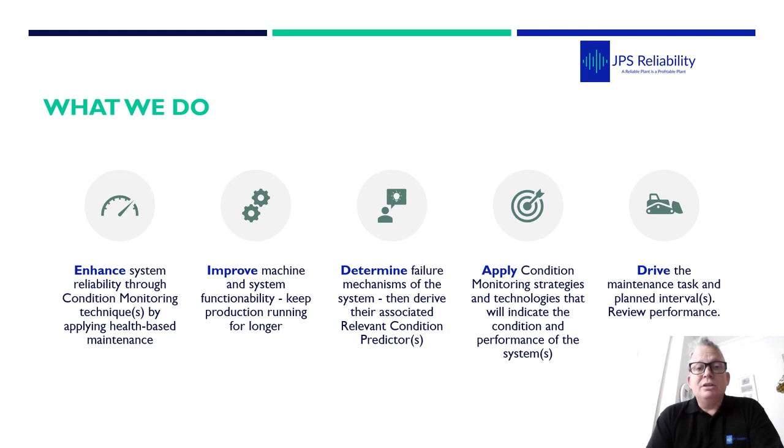practices. Our main work is we do some routine surveys, the traditional contract out reliability services, supporting companies who don't have the resources. But in addition, where a company have their own employees, we go in and help out, train, mentor, pass on knowledge to ensure that they're getting the best out of their program.

So this is our new book coming out soon, JPS Reliability Limited, Book of Gold, Practical Condition Monitoring Case Studies. This was really born out of our first book. We published a book 2 years ago-ish called Enhancing Reliability Through Vibration Technology. Now, that book was aimed at a seasoned analyst, VCAT 2, VCAT 3. It was like a revision handbook, like a condition monitoring Bible for vibration analysis.

So I had all the technical terms written in simple layman's terms, and always had some case studies in there. Now that book we sent all over the world. I think we've gone about 32 countries now with the book, and the biggest feedback we had was everyone loved the condition monitoring case studies. That's where they saw the gold was, hence why we've got this book of gold now.

Basically, we've got a proof copy coming through, which we're going to do a few little tweaks to. So that's the proof copy. It's published by the same company, The Seasoned Analyst, and this is a dust cover. Under the dust cover is the Book of Gold. Unfortunately, it weighs 1.612 kilograms. So it's got the black cloth hardback with the gold writing. We have a ribbon so you can remember where you're going.

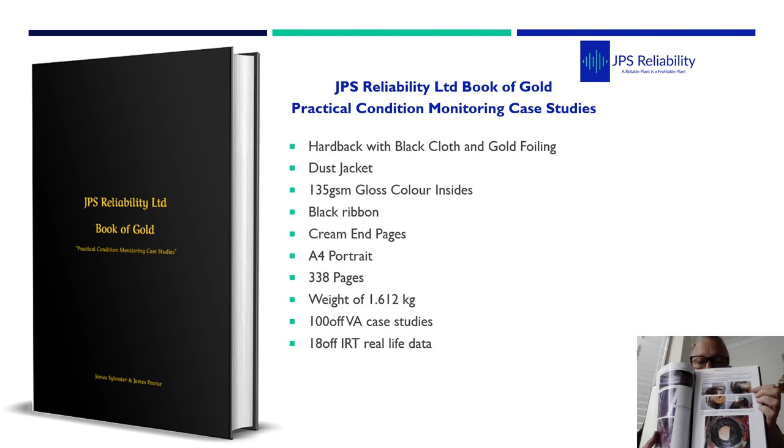The pages inside, we went for 135 GSM gloss, so they're easy to keep clean. And what that does as well, for example, on the images where we got stripped down images from our reports, it actually makes the images sort of jump out of the page. So this is 338 pages. In there we have 100 vibration case studies, vibration data, stripped down reports. We also have 18 thermal imaging real life data as well.

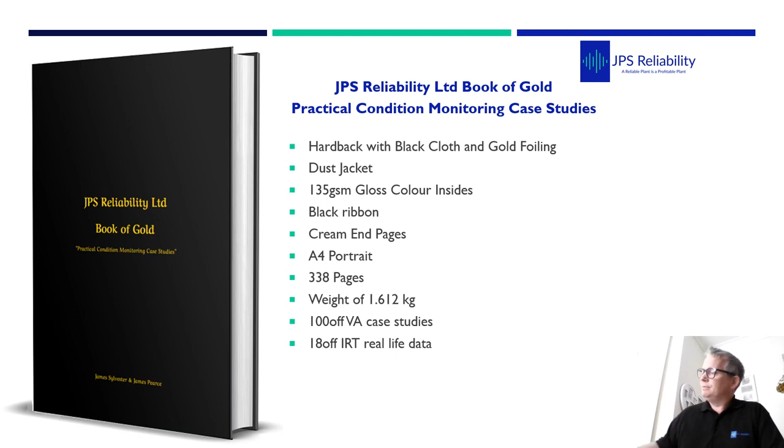So we're hoping that we get the second proof copy within a week or so, and we aim to publish in May. And we'll be sending out our first 20 copies all over the globe to specific people for promotion. And what I'll do now is I'll just go over the actual content so you can see what's actually in

the book. Now, for the content, we weren't too sure whether we were going to split it by industry type, steel, chemical, process. But a defect on a motor in a steel plant can be the same as a defect on the motor on the chemical plant. So we decided to split into chapters of equipment type. The first two chapters are really important. The first chapter is basically common sense pearls of wisdom, how to set up a condition monitoring program.

Chapter 2, very important now, especially with all this online IoT predictive world we're stepping into, is that if you don't measure it, you're never going to see it. So unless you know the defect and you sample high enough, you're never going to see it. Then we step into the chapters. We have chapter 3, which is electrical motors and electrical drives. Chapter 4, fans, compressors and blowers. Chapter 5 is pumps. And chapter 6 is gearboxes and gears.

Then we step into crushers, mills, dryers, grinders and centrifuges. Then a couple on paper machines. And quite a big one is the bearing EDM chapter, because we've seen multiple EDM defects, and we've collated the ones which are all different. So we've got 12 in there which are all different. Then we got our chapter on slow speed bearings, sleeve bearings, dynamic vibration absorbers, some visual inspections, using your senses to find the defects. And then we have 18 thermal imaging examples as well. And the last chapter is a few pages so you can write some notes.

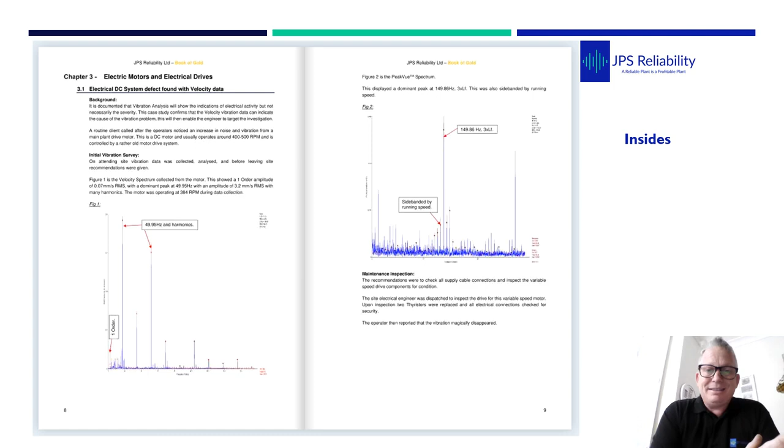I'll show you now a few of the pages inside the book. So this is the layout. This is chapter 3, electric motors. On our vibration case studies, we'll have some sort of introduction or background, our survey analysis, the vibration data, and then the strip down and what we actually found wrong with the defect.

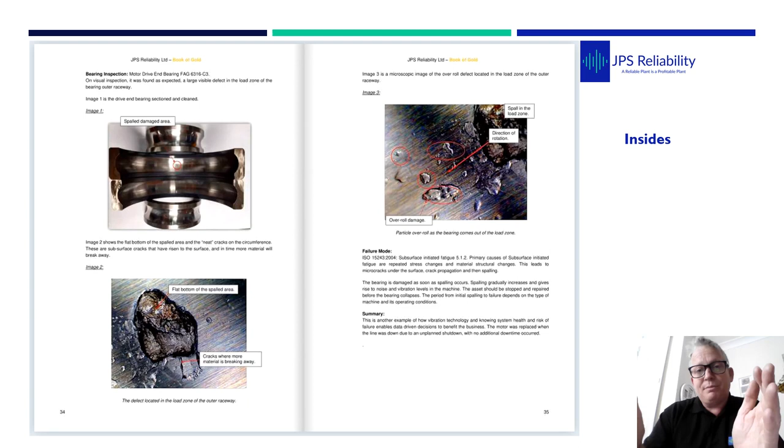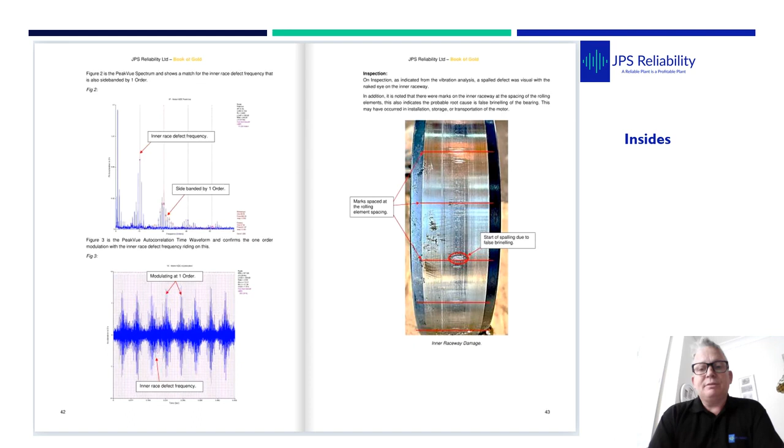This one here, you can see a spectrum showing inner race, sidebands by one order. We've got the time waveform, which is really where the gold is. So you can see it modulating at one order at BPFI, and then we got a stripped down image of the bearing, which has obviously got spalling and false brinelling. Another example here is the spectrum, waveform, autocorrelation of the waveform, and some more stripped down images.

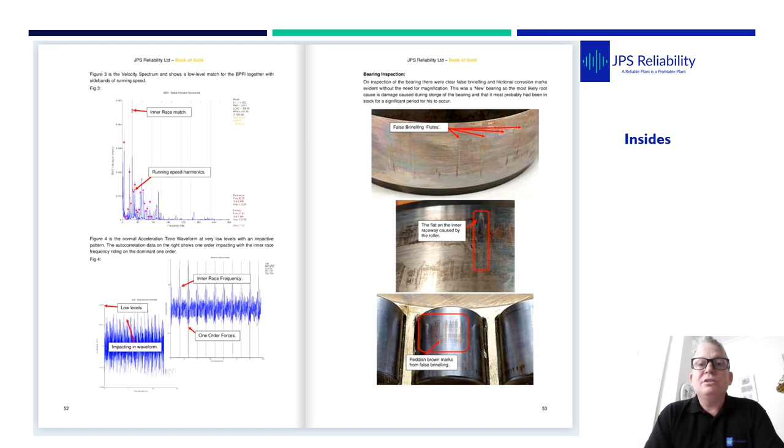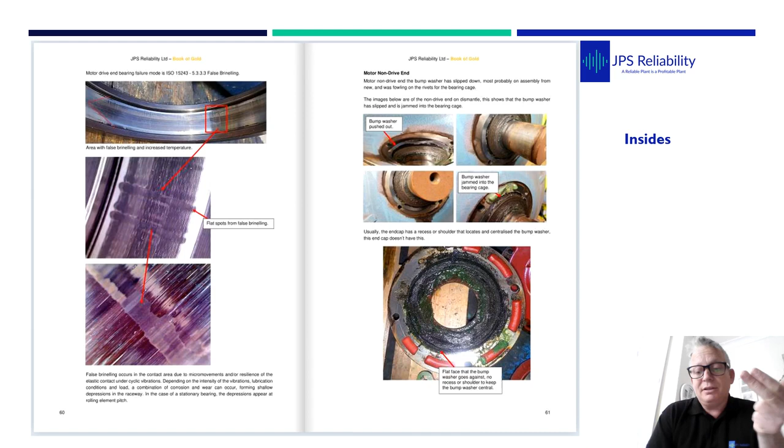This one here gives a stripped down image of some false brinelling, so you can actually see, we point out the defects in the bearings. And on there also is another defect we found, which was the bump washer was jammed into the actual bearing. So as you see, we use waveform, spectrums, and a strip down. They're all logically done in the same sort of way: background data, strip down analysis, and what happened.

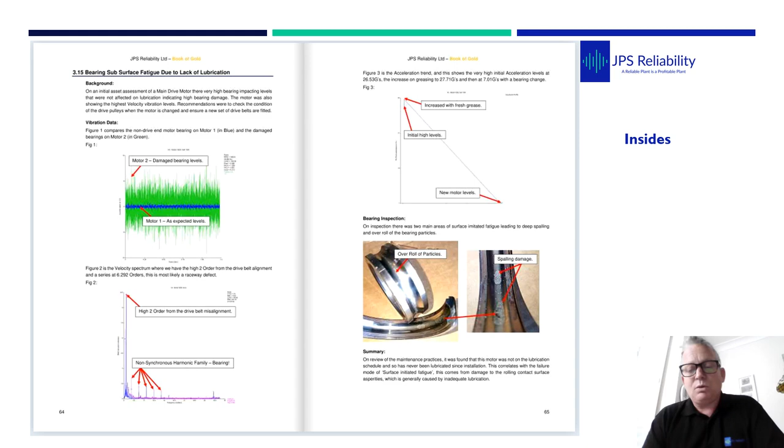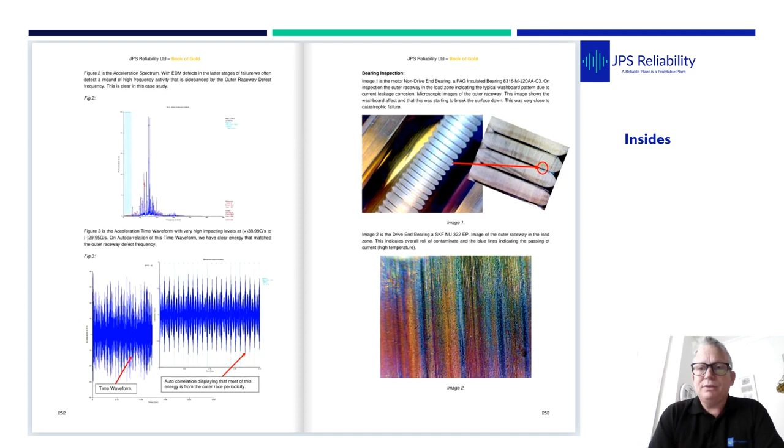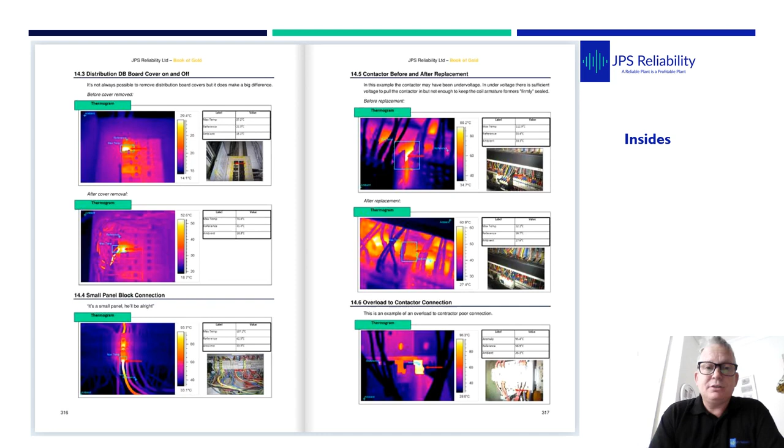You've got some more there. So we've got a sprag clutch, which was found as a defect. This is one of the EDM ones. So you can see the acceleration spectrum, waveform, autocorrelation, and also the defect as well. And at the very back of the book, we try to correlate our types of thermal imaging defects we found. So these are obviously mechanical process, and then you've got the classic electrical defects as well.

So to get this book out, because it weighs so much, we'll be shipping out in bulk to international stockists. So at the moment in the UK, we have Reliability Maintenance Solutions Limited, Australasia we're finalising, USA, Canada, and EU. We've got some contacts just waiting for confirmation. And as soon as we get these confirmed and the book's ready and it's out there, we will let you guys know where you can get it.